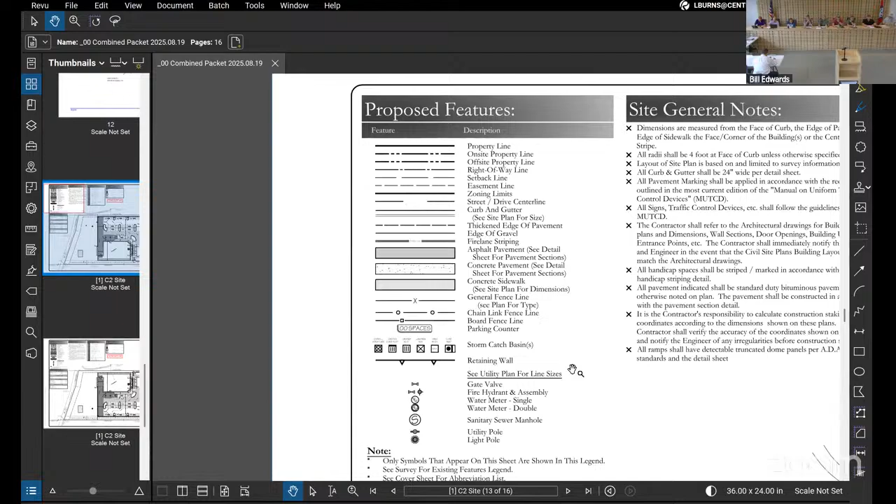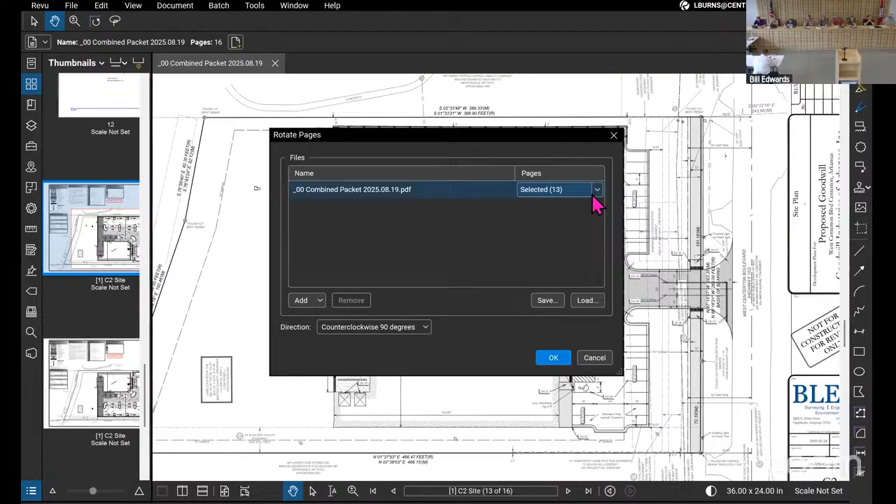All right, next thing on the agenda this evening under new business is Development 2504 Goodwill. This is a waiver request for 15.08.05B, 10-foot landscaped area, and 15.05.05D, parking location. The location for the building is 1218 West Centerton Boulevard. It is zoned C2 and it's 2.558 acres. Is the applicant here to give us an overview of what you guys are requesting?

Hello. Hi, I'm Cody Sexton with Blew & Associates. We've got two waivers that we're looking at here. The issue with the landscaping—Aaron, feel free to jump in if I miss something—is having it along where we have a position along the front, but with...

Just Cody, I don't think the mic's working. It's on. All right, so the AC is... no, the AC was not on today during court, so it's gonna run. Yeah, we don't care, I mean. By the hour, hazard pay or? Geez, so it was good for us. All right, sorry about that. I was good to hear you. Put a little more breath behind it.

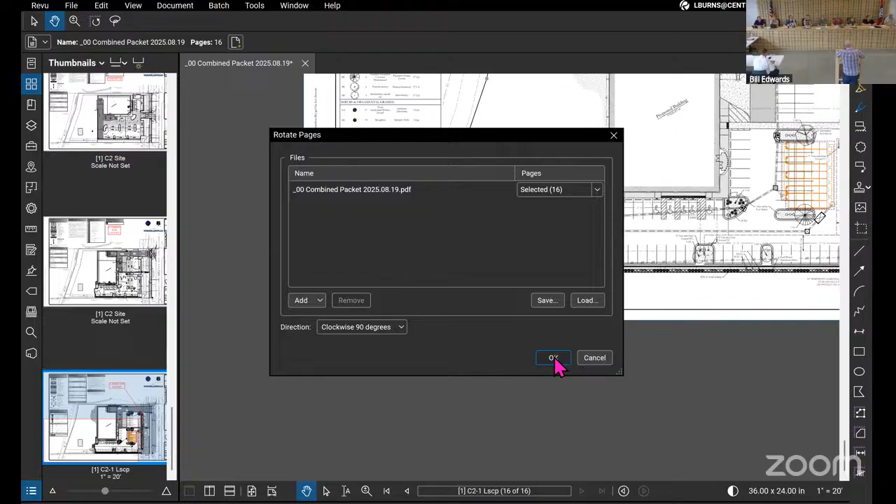Is that okay? Yeah. The challenge with the landscaping buffer area is that along the front of the property, we've got the utility corridor in there that eats up a lot of space. If that wasn't there, that would be landscape area, and then we just keep pushing the property back because we're at the utilities. And when we get to the back of the property, we're getting into the floodplain. So as we keep shoving the property back, we just don't have enough room by the time we get to the floodplain there to keep going. So making an adjustment to the landscaping position is just the easy solution all around going forward for this part.

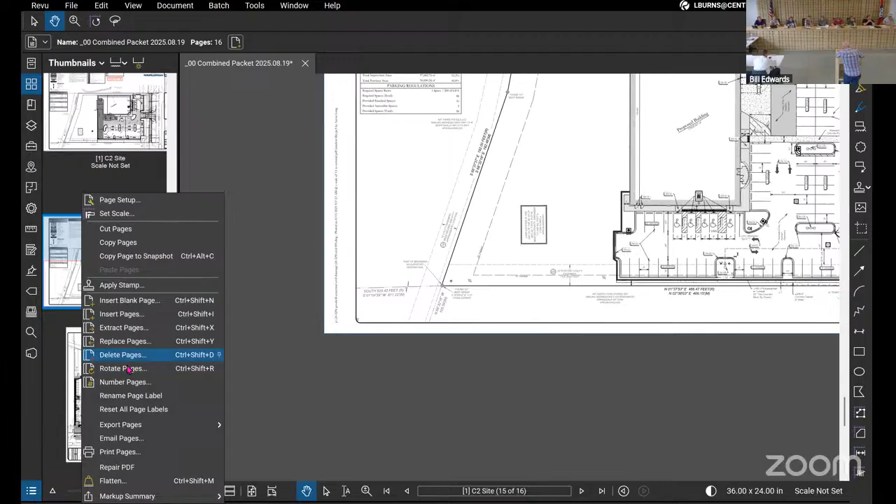The second variance for the parking—we've got a handful of challenges also with this property. Given the proximity to the intersection, as far as pushing back the location of our driveway to where that's going to be acceptable, because we can't have it too close to the intersection. We also have to mind the placement of the trucks, large trucks coming into the property, so that's dictating our building layout. We don't want the trucks coming in and having to wrap all the way around to the parking traffic. So by the time we factored in about five different aspects of the criteria, our most logical approach on that one again is with those parking requirements as it pertains to how much of the parking we have in front.

And we have gone through multiple permutations of trying to massage the site, and that course of action would be... All right.

Tara, would you like to give us a staff overview? Yes. Can you hear me, or do I need to put the mic to me? Probably need to. Can you hear me now?

Okay, so this is Goodwill Centerton. This is specifically their waiver request for the landscape area requirements along the frontage and the parking location being in the front of the building instead of on the side of the building.

The subject parcel is located at 1218 West Centerton Boulevard. To the south across West Centerton Boulevard is Domino's Pizza and the US Post Office, and directly adjacent to the east is the Woodcrest Walk subdivision.

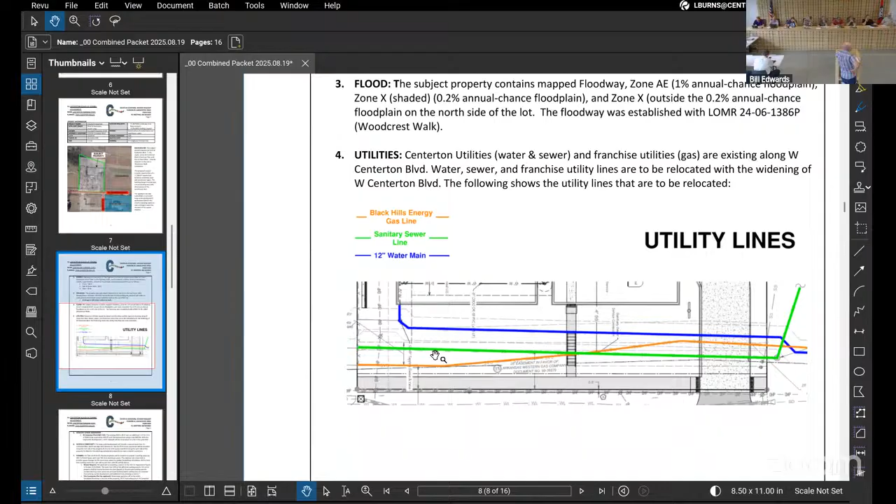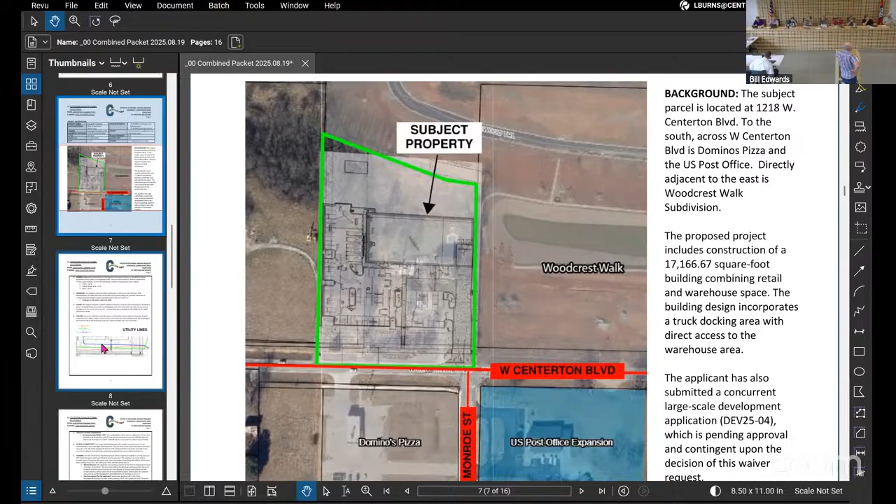The subject property does contain mapped floodway zone AE and zone X. Zone X floodplain is on the north side of the lot. The floodway was established with LOMR 24-06-1386P with Woodcrest Walk. Centerton Utilities, Water and Sewer, and Franchise Utilities Gas are existing along West Centerton Boulevard.

Water, sewer, and franchise utility lines are to be relocated with the widening of West Centerton Boulevard, and the following below shows the utility lines that are being relocated.

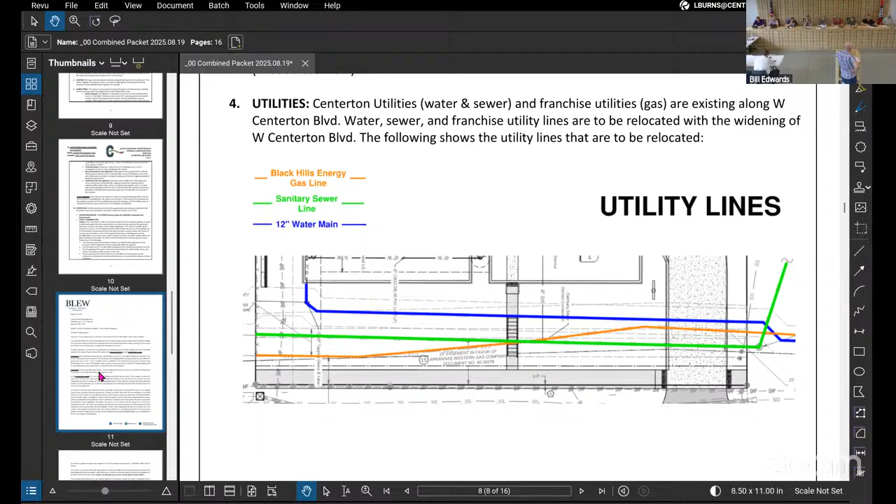With the adjacent street agreement, West Centerton Boulevard has an existing right-of-way of 40 feet, with an additional 13 to 19 feet of right-of-way to be acquired by ARDOT with the improvement project job 090238. With the large-scale development, a 10-foot sidewalk will be constructed or a fee in lieu will be provided.

The large-scale development will include two entrances, including a new entrance from West Centerton Boulevard that will align with Monroe Street right across the street from them.

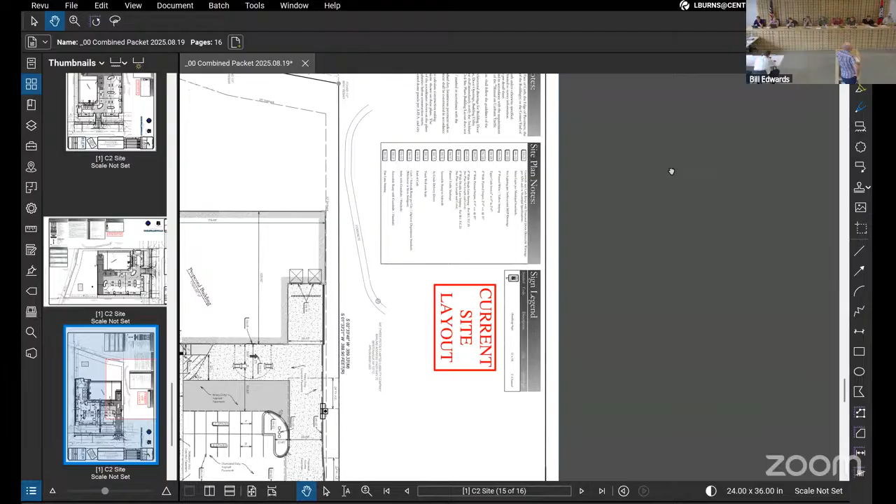24-foot access easements will be provided along the east side of the property, which gives Woodcrest commercial lots the opportunity to tie into two different spaces. Then a 24-foot access easement along the west side of the property will allow for the adjoining commercial properties to make a shared connection.

So for parking, per Title 140405F, this development will be required to provide one parking space per 200 square feet of retail space, one per 500 square feet of warehouse space. The engineer was requested to provide square footage for the warehouse space to update the parking calculations, but at this time, their parking meets the 1 per 200 square feet with 86 parking spaces.

Now we'll get into the waiver request specifically pertaining to the parking. The applicant is requesting a waiver to the Title 15 requirement found in section 150505D, that reads that no more than 50% of the off-street parking area for the entire property shall be located between the front facade of the principal building and the primary abutting street, unless the principal building and/or parking lots are screened from view by out-of-lot development and additional tree plantings or berms.

The site constraints per the applicant are the steep slope and the drop off to the north, the floodplain and floodway in the rear of the lot, the 50-foot front setback from West Centerton Boulevard expansion right-of-way, and the required driveway alignment with Monroe Street per city request, which is also a Title IX requirement.

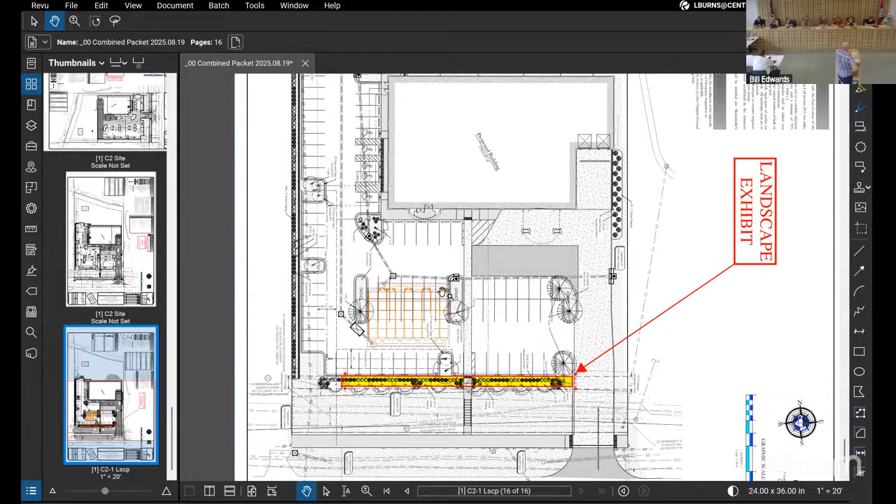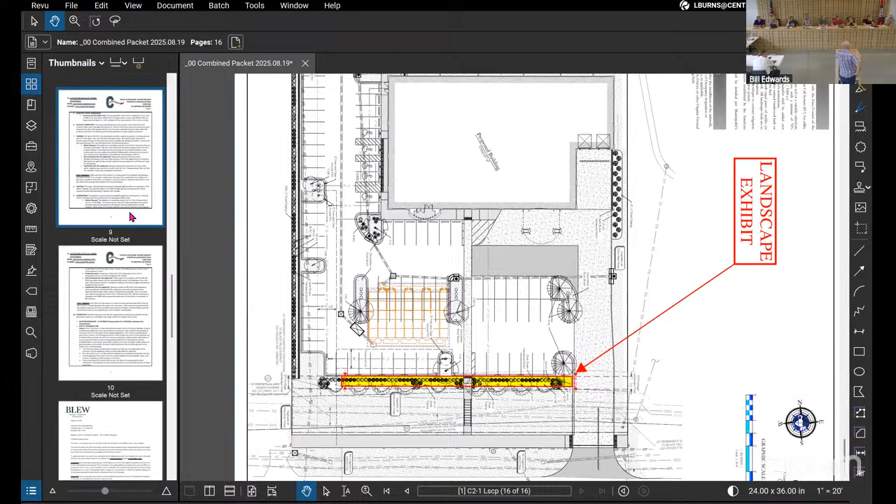I guess I'm just asking, is it worth trying to make this thing fit if it's not viable? Be across here. Oh, thing is, that doesn't really seem feasible to me to even consider one over there.

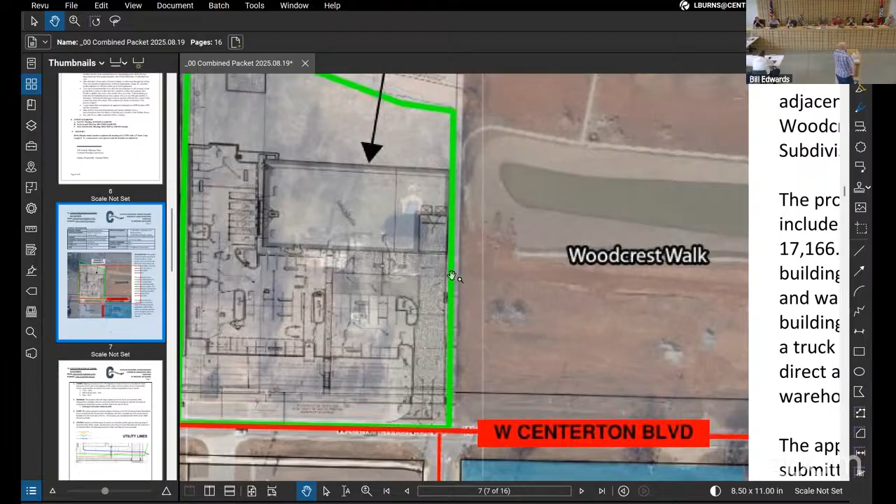I'm just asking, they added one on the east side. Yeah, we have them putting in two separate locations for access easements, and it'll be up to the Woodcrest Walk commercial site to make the connection where they seem feasible.

So they have two different 24-foot access easements where the rear lot access easement can come down and connect, or it can connect a little bit higher. And then all of that along the Woodcrest Walk, there's a big utility easement angling through there with the sewer.

So whether the access easement goes along the south side of the detention pond, so it's at the rear of the lot. So if that ends up - if they bring that around, then they can still connect in the front, whichever way works best when they develop. They would have two places to tie into.

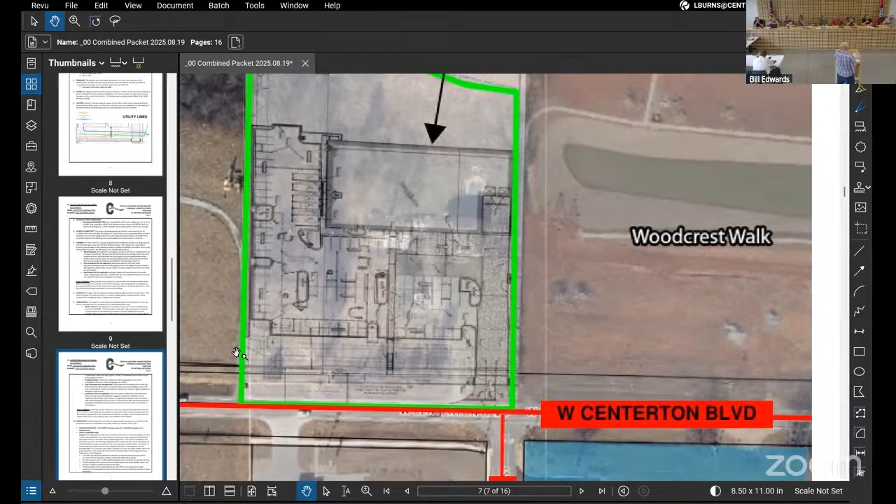You said there's a retaining wall going in on the east. West - it's down there, okay. Yeah. We shouldn't use the word west anymore, we're not talking about that side. We should focus on the east side.

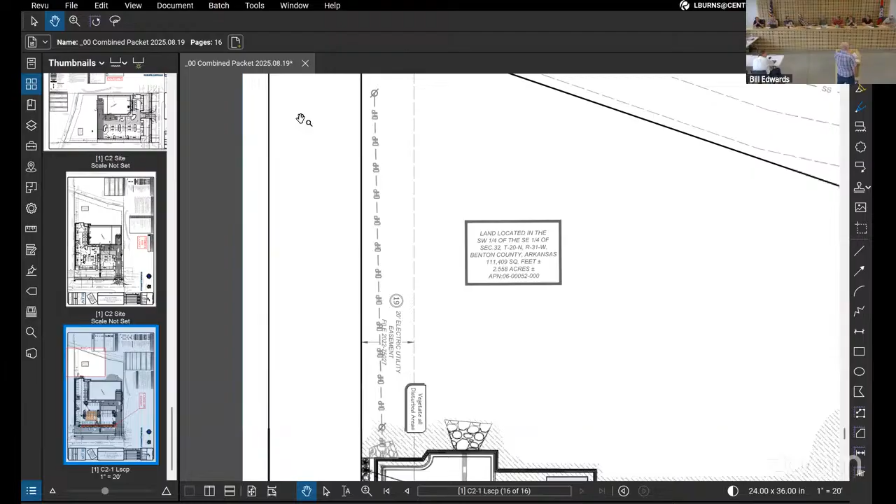You wanna look at these one by one? Jeff? Yeah, so let's start with what's labeled as current site layout. Does that work? Can we start with that one? The one for the landscape.

Is the first waiver for the parking in front, right? The first waiver - the concept - yeah, the first waiver is for the parking. They're under the same, just waiver, whichever one you want to talk about first, it doesn't matter. But there's the landscaped area and then the parking location. Let's do parking first. Cody, what's in all of these?

I don't see any site plan that puts the building up front. Is there an issue with that?

If we're looking at this one, if you rotate the building 180 and tuck it in the southwest corner, can you not keep the driveway where it's at and then eliminate the need for this waiver?

I think, and all the parking east of that, Joy - north? Yeah, north and northeast. Issues with that is we start getting into the truck having to come all the way through the properties, that's the case there.

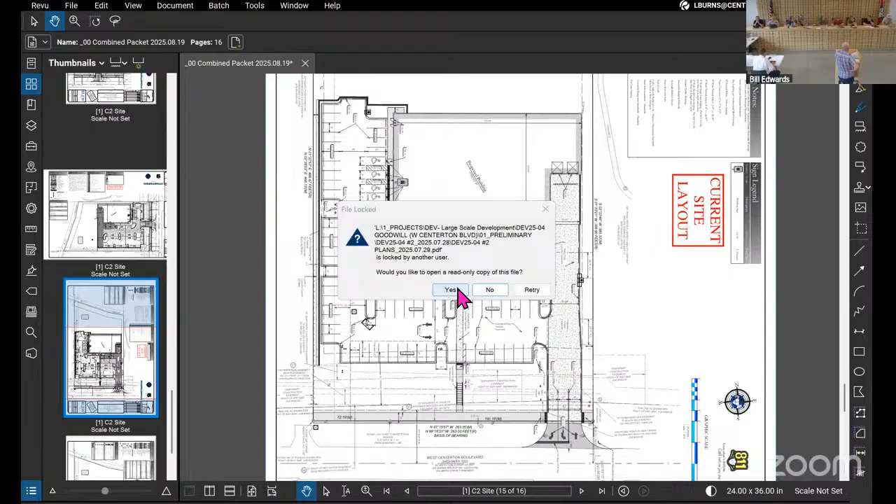You asked what limitations there were. I know that was one of the big ones, it changed the retaining wall, either going around. I'm not sure what that does for access going around. The high corner is in the southwest corner. It's pretty high, if they move the building there, then everything's sloped down from there, but they gotta build the whole thing, put a retaining wall around the back, and a lot of fill in.

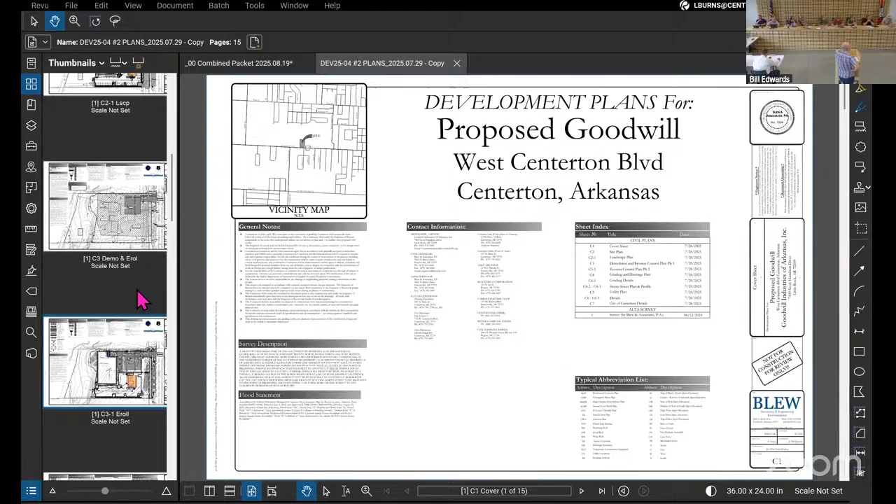Really, my question on the building location is, one, what specifically the code says, which is no more than 50% of the off-street parking area for the entire property shall be located between the front facade and the primary abutting street, unless it's screened.

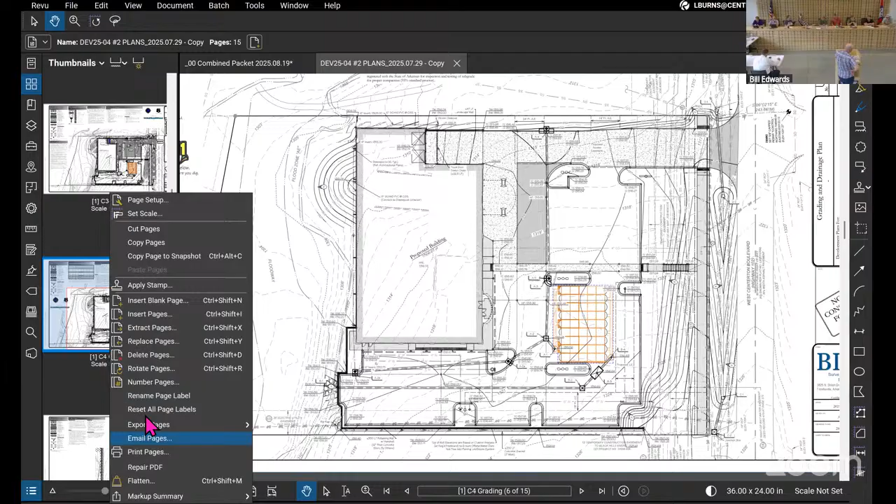I think that would solve that problem. Unless it's screened - does your concept one... So it has to be, I'll preface this because it kind of confused me too - it has to have a building in front of it and it has to be screened. It's not and/or, so they have to have a building in front of it and it has to be properly screened. It can't be like, well, if they screened it beautifully that would work - it has to be both.

Yeah, for sure. How much of the space is warehouse? I got that, it's gonna be 7,860, that would be warehouse, and then retail would be 9,300, so that would bring down the parking count to 63. So right now we're showing it at 86, so that's where we could potentially remove those spaces on the left side. We just haven't been able to do that because we're trying to get this through first.

Yeah, because I know you have to have the warehouse space in order to process everything you're doing. But according to this, the parking was for one for every 200, there wasn't - for 500, so I do think that's how you reduce the parking space issue.

If you reduce the parking space issue, doesn't that solve somewhat the landscape issue? It may solve that - I haven't created a new concept for that, but...

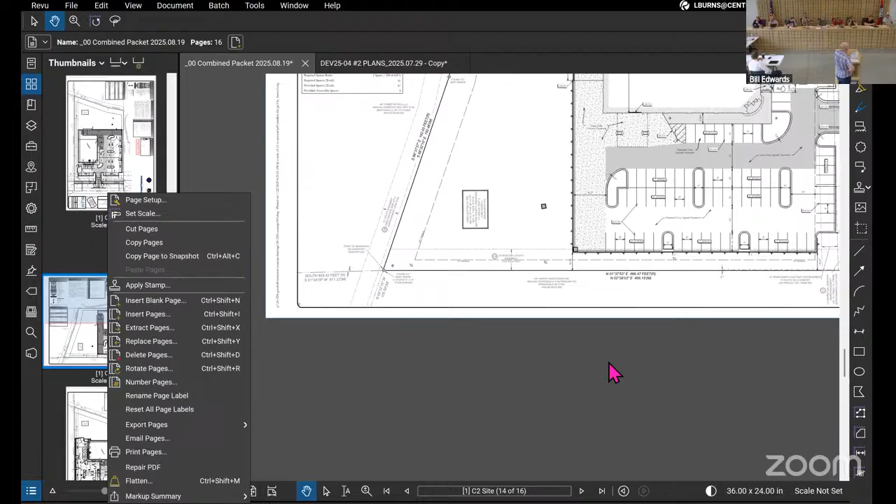But the driveway, what I'm thinking, has to get moved to the east. Has to be adjusted. The problem is there are two concepts, put the entrance in the middle across from them, and it doesn't line up. If you go to concept two, concept two shows the driveway in that northeast corner, but here the driveway's in the middle. When you align the drives for your driveway separation, the fire trucks can't make that turn, so then you're losing your access.

So that's why, again, kind of back to- I'm not an engineer, I'm just playing with this. I don't understand how concept one- didn't somebody already say the drive couldn't be put back to its original location in concept one, since we're getting rid of parking spaces anyway? And maintain the- the drive has to go on the east property line, so on concept one it's gotta go where it's shown on the current layout for the drive entrance.

To align with Monroe, otherwise it doesn't meet separation requirements with all the drives. I know it's a little hard to see because it's not labeled. Maybe we're not being clear. Concept one, if you take that and move the driveway back to the east, why doesn't that work? The trucks have to go all the way through the parking area for everyone in order to get over to the truck dock in the back.

Well, could you mirror the building where the truck dock's in front? But then we're gonna have a truck dock with the front facade. You're gonna have to screen it really good. We're just trying to help. Frankly, we can't use a box truck having to go through your site as a justification for a waiver. Say it's a box truck, not a tractor trailer, right? It's still a truck. It's not an 18-wheeler, it's a box truck.

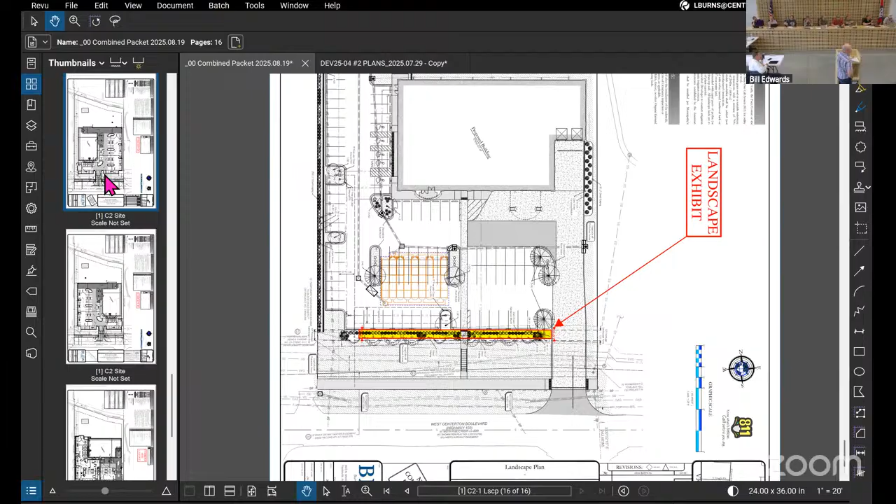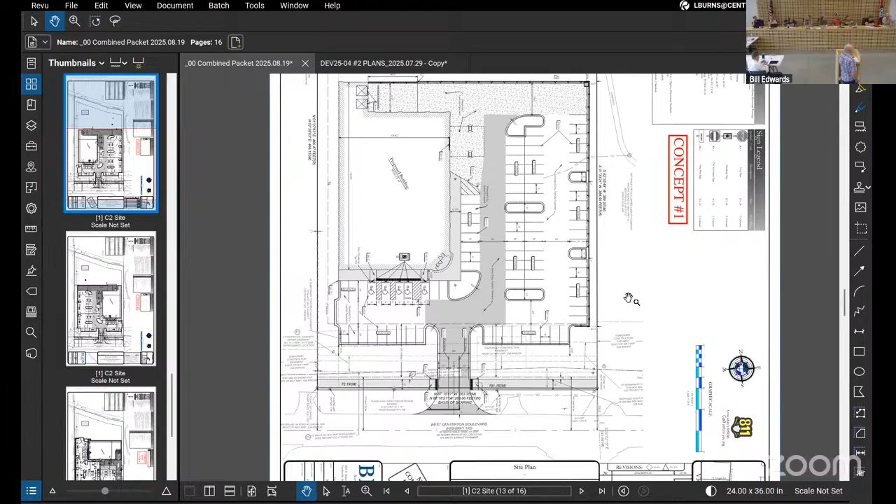Well, why can't you put the—Because it won't meet your separation requirements. I got confused. In the current site layout, where the driveway is, is where it has to be. Yes, that's what Brandon's saying.

And I'm saying in concept one, why could we not go back to that? Yeah, that's what we're saying. You'll lose 20 spots, which we said you could reasonably do at this point. The only challenge is you're now driving a box truck through the parking lot with spaces that you were trying to shield yourself from anyway, but people are gonna be driving in and out anyway. Why would that not solve the problem?

I guess now we're back to the landscape problem, so we'd have to give up 2 feet because they're not gonna be able to get rid of more spaces up front. Am I thinking clearly on that, or some of the things they brought up were the grading issues too, that they have to look at.

Grading issues? Once ARDOT comes through and obtains their new right of way, what's the width from the edge of their right of way to the edge of the landscape? I don't know. What's left for utility?

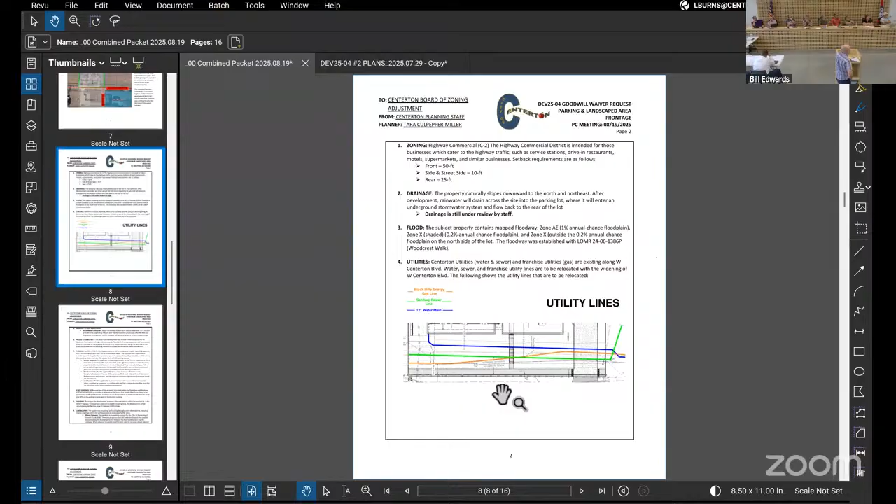For sure. And here's the actual location of—is the water line, it's a water line that goes in there. So, and there's the edge of the easement. I'm just wondering how wide it'll end up being, because once they widen 102...

She just said the easements that are in place are sufficient for the widening. They already have this. Construction is supposed to show where the lines are going, is what I understand. Here's the 10 foot sidewalk, comes by ARDOT, and then these are the gas lines. That's proposed relocation, that's what I understand.

The sidewalk is per the master street plan. Would these plans not have the ARDOT plans incorporated into them? No, the DOT plans don't show sidewalk, they're doing that separately. But that's the right of way from the ARDOT plans? Sorry—big dark line just north of the sidewalk, I think. It's the right of way. Okay.

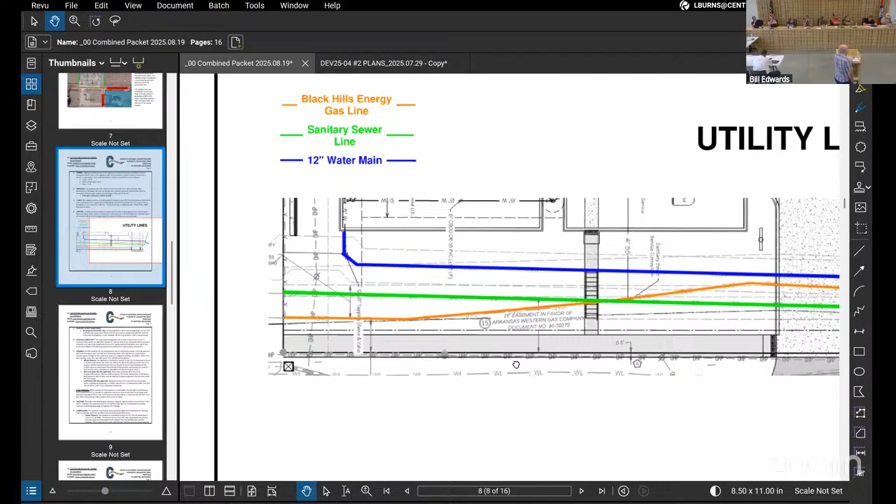I think it's this line right across. Sanitary—that's this darker line. It's hard to see on this plan. So the gas and sewer are gonna be in the—it jogs up and then it hides in that. They'll be all north of the right of way.

Right across there. I mean, these easements are called out as if they're there. Right, but I'm just wanting to make sure that when ARDOT gets their additional right of way, that it's not overlapping on top of those where you can't access them.

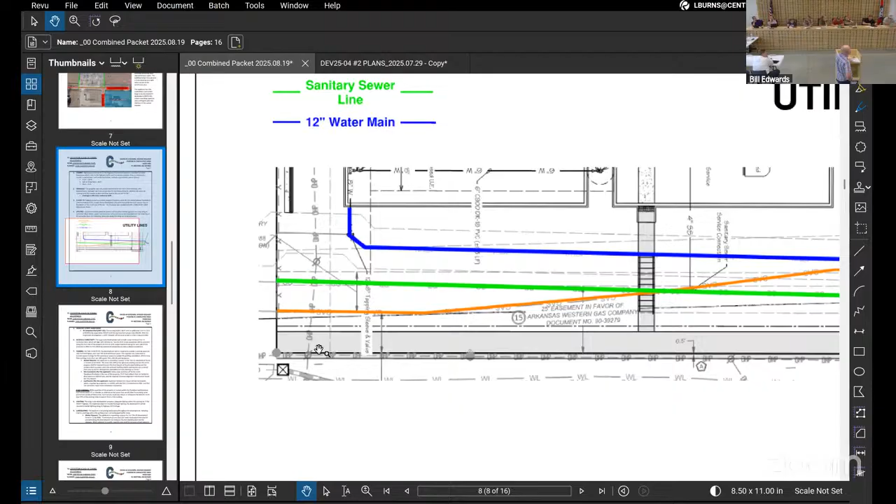This dark dash line north of the sidewalk, I believe, is the ArDOT right of way. It's per a job number, so they have that set in stone of what it's going to acquire. It's still a variable width, 53 to 59 feet from the center line. The lowest point is about 53 feet from the center line, and about 59 feet at the other point.

The utilities are being shown outside of the right of way. Right, but depending on what size those lines are, there may not even be enough room in there to get your separation. I don't think they're moving, I think they're just staying where they're at. Well, it's a 12-inch water main, and our code requires a certain separation between the water and sewer. Let me look for it.

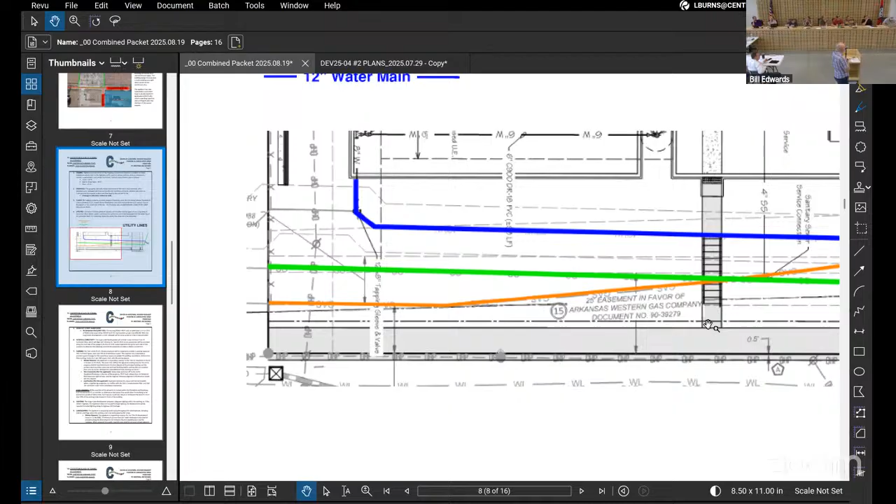The right of way was drawn in for the Black Hills Energy plans, for the proposed easements. The water line was drawn from ESI plans west from Centerton, and I'm not sure about the rest. So that does show relocated utility, but at the end of the day, that's what it's gonna be per plan right at this point in time. Sure, it could change.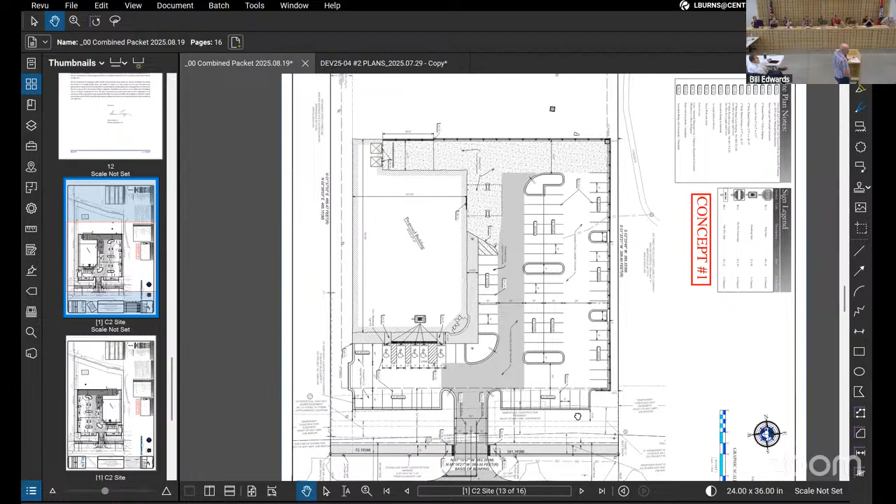So you all brought up the connection access easements. If we do this, it's going to make that even harder, by forcing the grade to be up high. This concept forces the grade to be really, really high and build a retaining wall around the east side, which we don't have right now. So that would make it really hard to connect to Woodcrest.

It would also make the contractor spend a lot of money, and the owner, to build this kind of site. So yeah, I think if you cut it, the connection is easier, but for the east side it would make it much harder. Why can't you cut? Because the high point's in the southwest, that's the problem. So by putting the building there, whether it's 2%, 3%, 4%, whatever you want the parking lot grade to be, there's gonna be huge walls on the east side.

So, it doesn't have to be 2%. You can go a little steeper than that to make that up, and you can also cut where the building's at. You're not held by the existing grade. Obviously, you have to tie back into the west, but you're proposing a wall there.

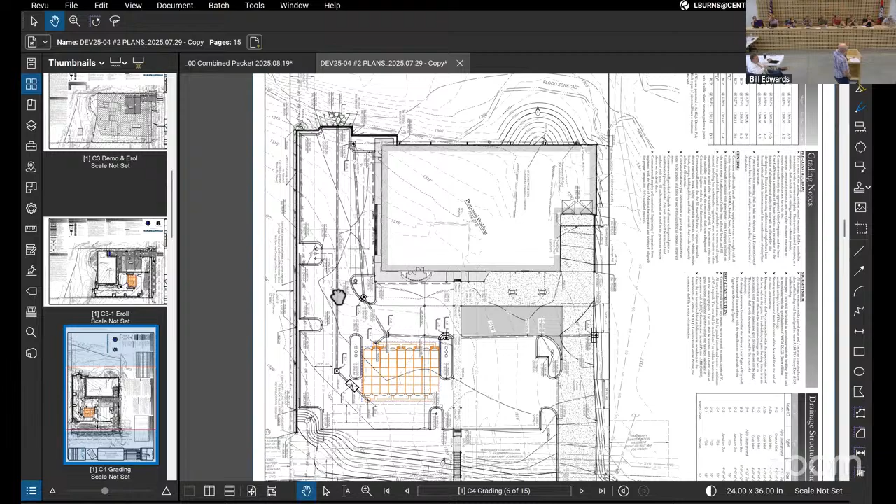Does that show a retaining wall on the east side? No, it's strictly because of the building location. Yeah, because we can go down with the driveway at, I think, like 8.5% or so, and then have reasonable grades within the parking lot to go down to access the truck dock.

So on concept 1, the issue with moving the driveway back to the top is that you are gonna just be driving across the top of that parking. That's the only issue, because you can get rid of those spaces, you got 23 to play with. If you got rid of the other 3 right there at the beginning, does that give you enough room to create your drive through?

I mean, it solves all the problems, right? Not the wall, not the landscape problem, not the walls and the access to the east problems. It would still create issues for future accessibility, cross access between the parcels that planning is wanting.

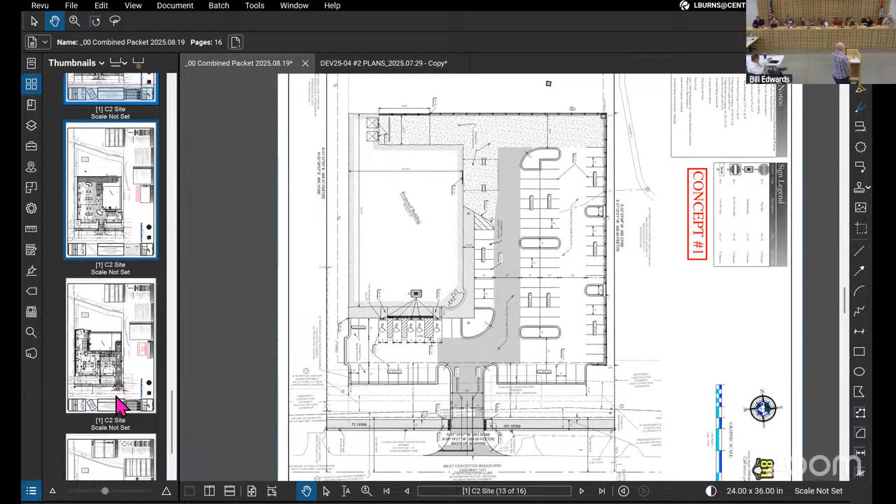Is there a wall there? There is, on this concept, there are walls around the entire parking lot, on the northeast. So in the current concept, you don't have to have the walls, but in concept one, you do. The current site layout, we have a wall along the west side because we're cutting down.

But we do not, we have a small landscape wall next to the truck dock area, but apart from that, we did not need any more retaining walls along the east side, which will allow that cross access in the future to Woodcrest. I mean, you'd have a whole parking lot to grade down on.

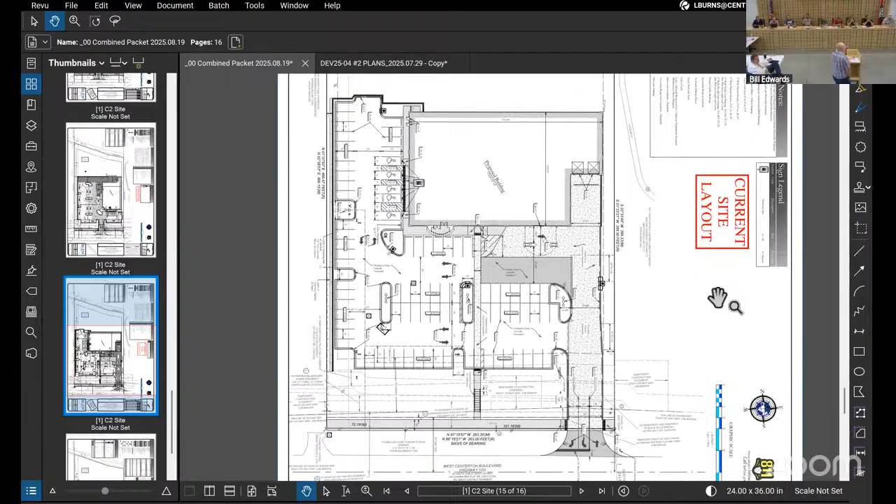I don't know, how tall is your wall? I have to look at the top wall, bottom wall. I think it's 9 feet max on the west side. I'm saying on the east. On the east, it's like 2 to 3 feet tall. It's only by the truck dock area.

You got 140 feet to grade down. Maybe we go a little steeper than 2%. Well, the driveway is going down at 8.5%. I think it's graded more than 2%, but I don't know, if we're gonna be grading the parking lot out at like 5 to 6% or something like that, that's not really gonna be practical. Not steep at all.

Why is that unpractical? Cody, do you wanna help me? I just don't understand. I just don't understand, I don't understand.

I mean, again, it's just the simplicity of my mind, and I'm not an engineer, so I don't understand how we currently in the current project don't need a retaining wall up there where the street's supposed to go and the entrance is supposed to be. But then once we put it back there in the next concept, we have to have it. So can you help me understand?

I mean, so up in that corner, yeah, where the dock is. Yeah, today, if you think about a dock where it goes down, yeah, if I understand it correctly, that would go down. And so they wouldn't need the retaining wall there to protect it. Am I saying that right?

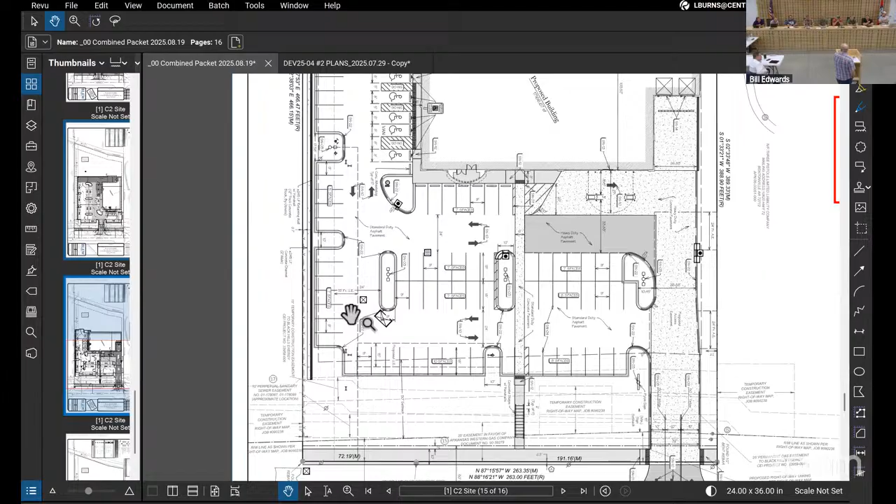Do the other commissioners have a recommendation or thought? I like the idea of keeping it there at the road on the east side — not just so it lines up with Monroe, but so it's easier for the next building that's going to come in on the east, so they can share that driveway. And we've probably noticed our traffic issue and the problems we put out there on 102 — the worst that's going to get.

And then the — we're granting a waiver for parking when it doesn't happen here. That waiver for parking, I mean, I don't know that. We're granting a waiver for parking, but I don't know what the impact of granting the waiver or not granting the waiver is. I can only yell so loud.

Don't hear a thing — thanks, I can't yell, I can't hear right now. I guess I'm asking the other commissioners the contention with that plan right there, other than, okay, it's more than 50% parking in the front, and you're losing 2 feet of green space or landscaping space.

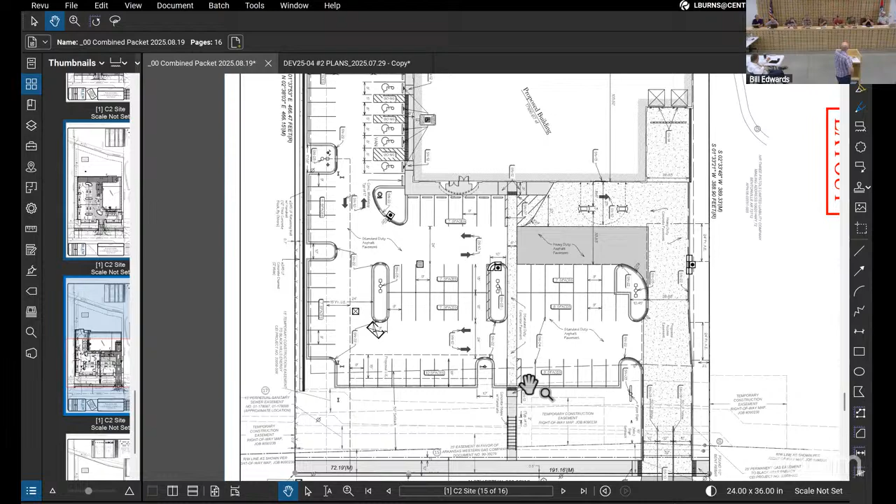So that leaves us with two choices, and the good thing is with us trying to work with you, we can do this. We could table it, and then you would come back with a new concept based on some feedback. Or we could just flat deny it, and you're gonna come back that way as well. So those are really down to two choices, really three, but if you say take a vote, I'm happy to entertain a motion from the group and we'll take a vote.

If it gets denied, you're gonna come back anyway, most likely. But I think a willingness to work with us and some of the feedback helps. So I'm open to whatever you would prefer. I think it'd be more advantageous on our side if we tabled it. It shows your willingness to work. How's that? So you want to table it?

It's John, I motion. Hold on a second. Any other questions that we didn't answer that may help with any guidance?

Just want to say that the new easements and right-of-way acquisition were not in the initial concepts, which could make it difficult, but we are open to trying to meet the Title 15 standards as best as we can with any waivers. So.

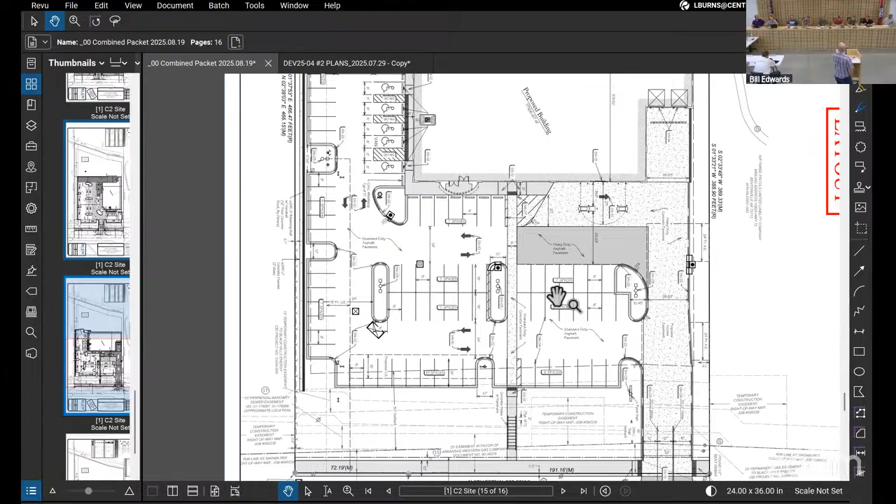With that, I would entertain a motion to table the request for the waivers this evening. It's John, I motion to table request for development 2504 to make more adjustments to meet Title 15. Second. Motion with a second from Joey. And is there anyone that's opposed?

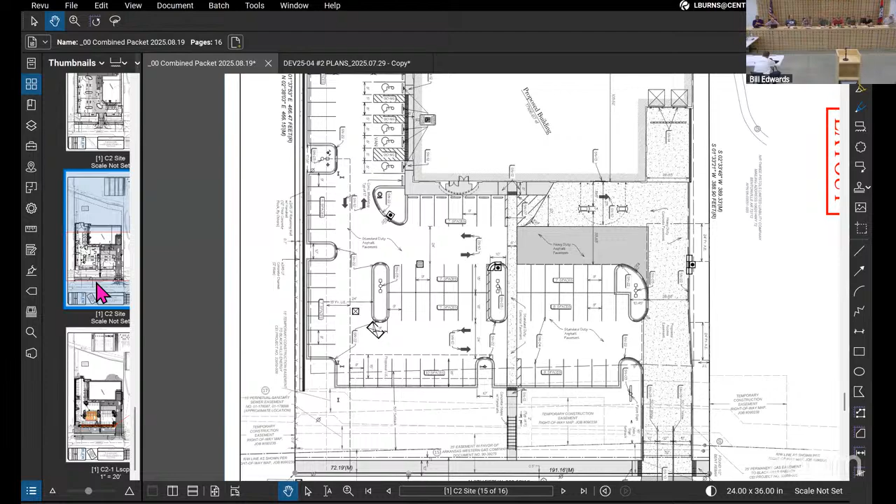Mayor Bill, did you want to share the news about the meeting next week, since it didn't make our agenda?

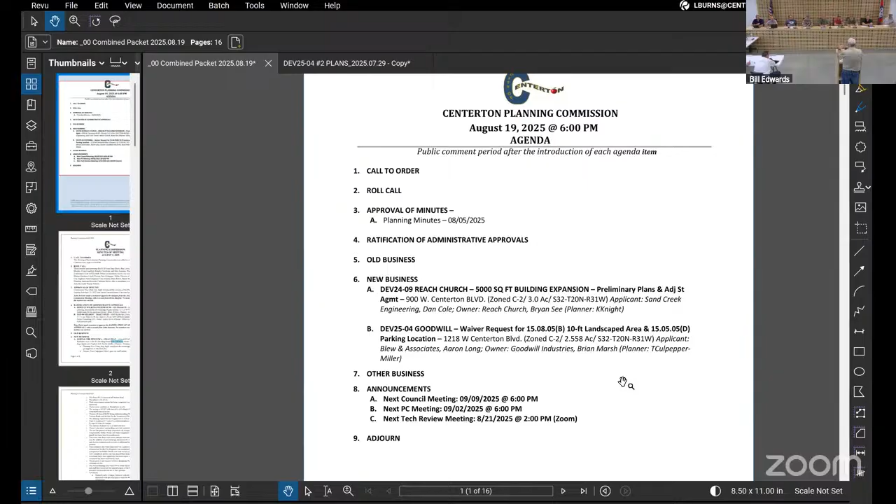Yeah, so at our last council meeting last week, there was about an hour and 20 minute discussion about water and sewer capacity, which is an update from when I talked to you all. It's on the Centerton YouTube channel if you want to watch it, see what we discussed. It was a very good discussion. Mayor Tharp actually indicated that we might get a little bit more capacity than they originally applied for.

But the council had questions. We did ask someone from water and sewer to come to the meeting. They did not show, so they've asked for a special council meeting with the Water and Sewer Commission. It's going to happen next Tuesday here at 6 p.m. It is a public meeting. If y'all want to come, you're welcome.

They just want some clarifications on things we're going to do in the future, and let's get some feedback. I've got a whole list of questions that I've asked our staff and the council to let me know, so we have a good early meeting and direction going forward, and figure out if we're going to stay with Decatur or go with NACA. We don't know. That discussion the city council with water and sewer commission need to have, so it'll be next Tuesday at 6.

There is a tech review meeting on the 21st. Anything else from staff? Anything else from the commissioners?